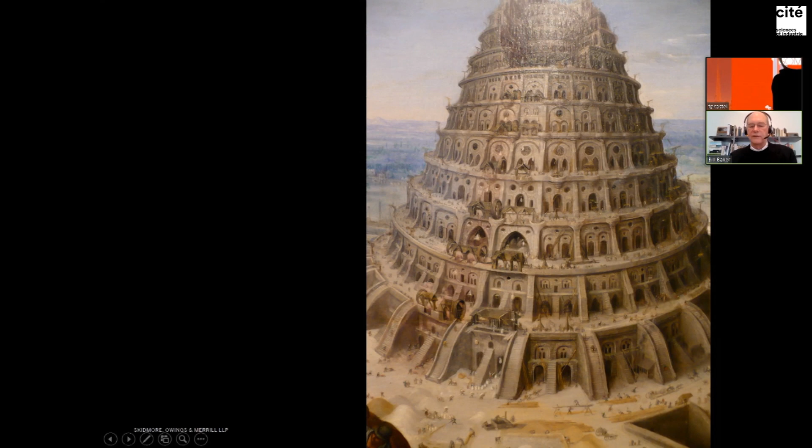We've always, as humans, had this desire to go high, to build things that are tall, or to experience great heights. It's part of our culture. You go back to the story of the Tower of Babel and wanting to build high, or when you go to the mountains, you have to climb the hill to see what it's like at the top.

Now in tall buildings, there's debate about what is the world's first tall building, but I'm going to talk about the Home Insurance Building a little bit. It was all of 10 stories tall, considered one of the first skyscrapers, built in 1885. For thousands of years before these buildings, people lived near the ground where they could walk up. But this building had two things that made it different: a structural steel frame, so a very distinct structure, and it was an elevator building. These two things, structure and vertical transportation, are the essence that affect the development of tall buildings.

So here we are in 1885. It's worth noting that in Paris, just a few years later, something much taller was being built. It wasn't considered a building, it wasn't considered an office building, but the Eiffel Tower certainly—it wasn't steel, it was iron—but it was certainly some brilliant engineering by Eiffel.

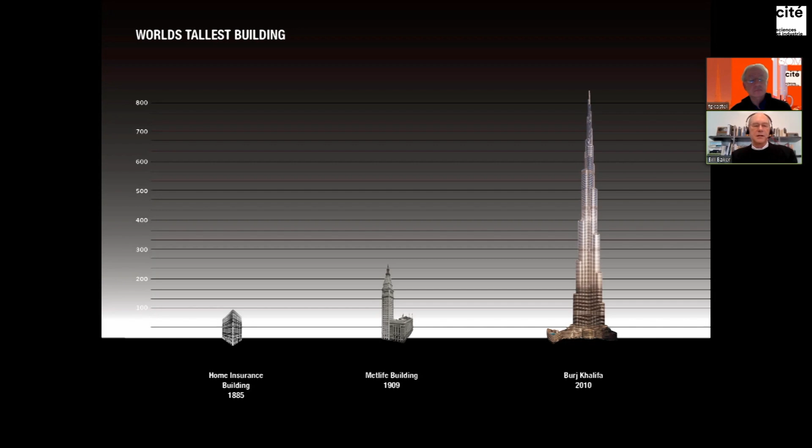Now, the height of buildings approaching the Eiffel Tower occurs early in the 20th century. And then we get to the Burj Khalifa, which opened 11 years ago. There's been this huge change, this huge scale in the height of buildings and the ability to go high. If you look at the history of what the world's tallest building was...

You can see that there was a quick run-up into the 1930s when you had the Empire State Building, before that the Chrysler Building—these tall buildings—and then there was a hiatus caused by the Great Depression and World War II. Eventually tall buildings started to be built again in New York, then Chicago, then around the world. But the interesting thing about the Burj Khalifa is that while many of the other buildings going back to the 1930s were just incrementally taller, the Burj Khalifa was remarkably taller.

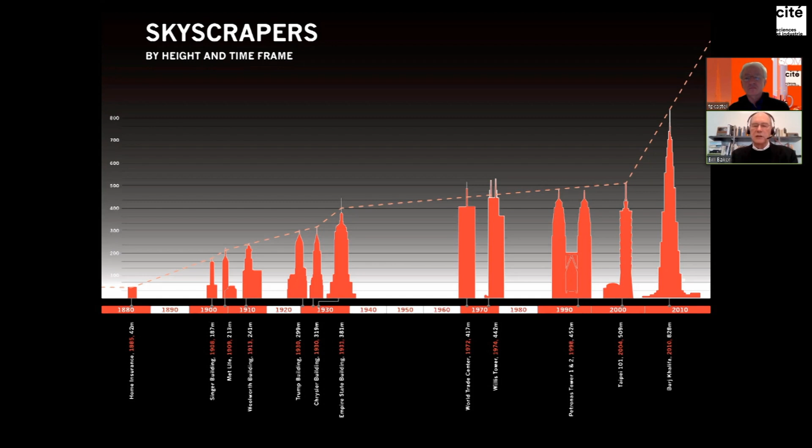In light of that, I want to try to get across a couple of ideas. One is that when you look at a tall building like this one our firm did—it used to be called the Sears Tower, now it's called the Willis Tower—if you look at that and see thousands of beams and columns, that's too complex, our brains cannot deal with that. But if you look at it and say that's one giant beam coming out of the ground, that's how we think about these things, as if they're one object. They're not many, they're one object made of many parts, but they're really one object.

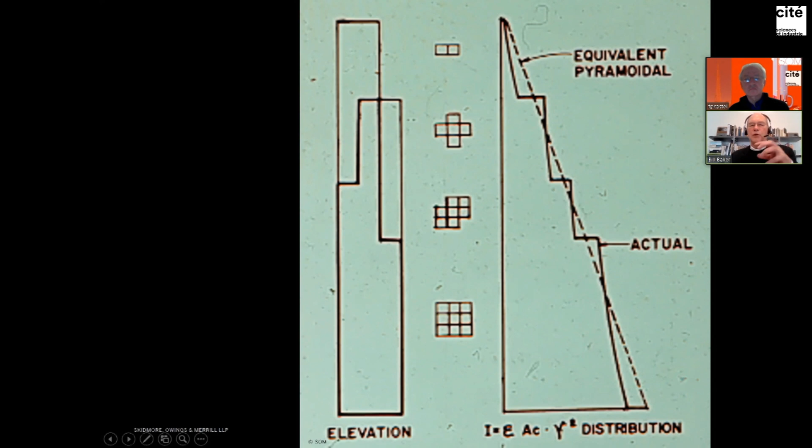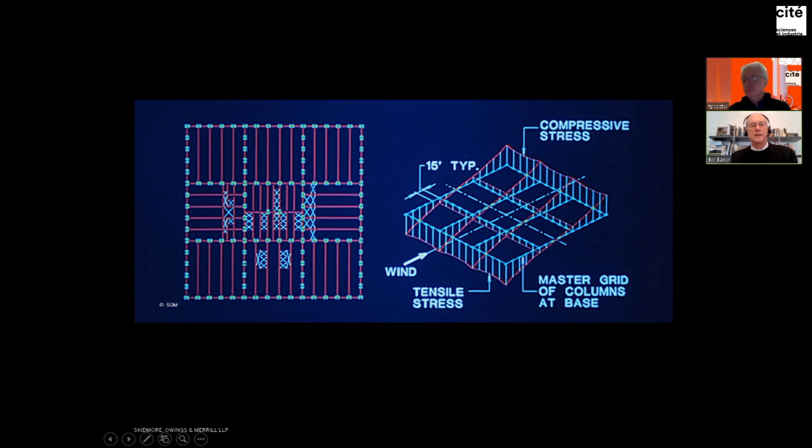I pulled this out of our archive at the office. This is a little diagram done by the designers, where you can see in the middle, the building is a series of tubes—it's called a bundled tube. There are 9 tubes that then go to 7, then 5, then finally 2. So it's like a giant beam where the shape changes as you go up. If you look down on the building, it feels like a series of boxes put together—these structural boxes, which clustered together, can resist the wind. The lines of columns in one direction act like the webs of a beam, and the cross frames act like flanges on a box beam.

And the other thing I want to talk about is issues of scale. I'm going to introduce that, but I'll talk about it a bit later.

It's kind of important to know where the heck is Dubai. Well, it's in the Middle East, in the United Arab Emirates. It's one of the few Emirates that doesn't have any oil, so their commodity is trade. Dubai is to the Middle East kind of what Singapore is to Southeast Asia - it's the place where everyone goes to do business. If you're a business person in one of the surrounding countries, you're likely to have office space in Dubai. It's a very welcoming place, very welcoming to people from all over the world.

We got involved in the project. We had a competition back in 2003, and this was our competition scheme.

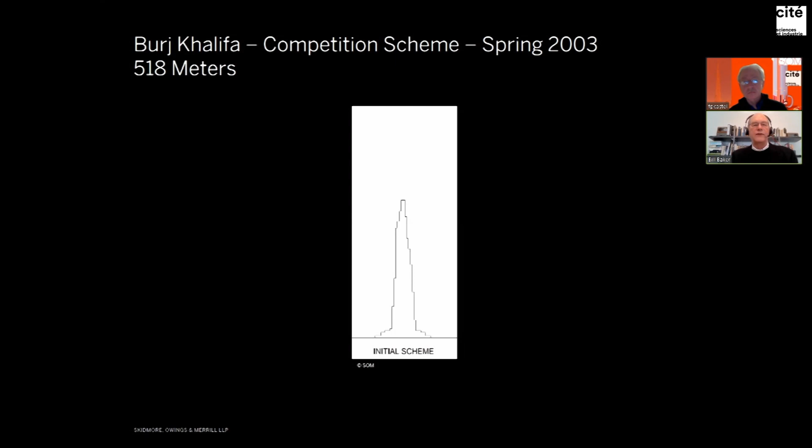Then in 2003, we were off to the races, and we started out with a scheme which was only 518 meters tall. It quickly grew to 725 meters tall, and finally the building we built was 828 meters. The change in height during the design phase was equal to the Eiffel Tower - if you took the building we started with and added the Eiffel Tower, you would end up with the building we eventually built.

It's 828 meters, slightly over a half a mile tall for those who use metric or imperial units. And how big is that? Well, here's what it would look like.

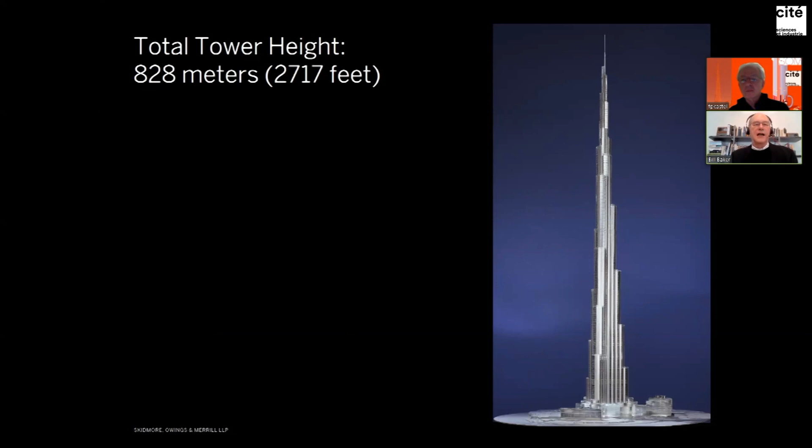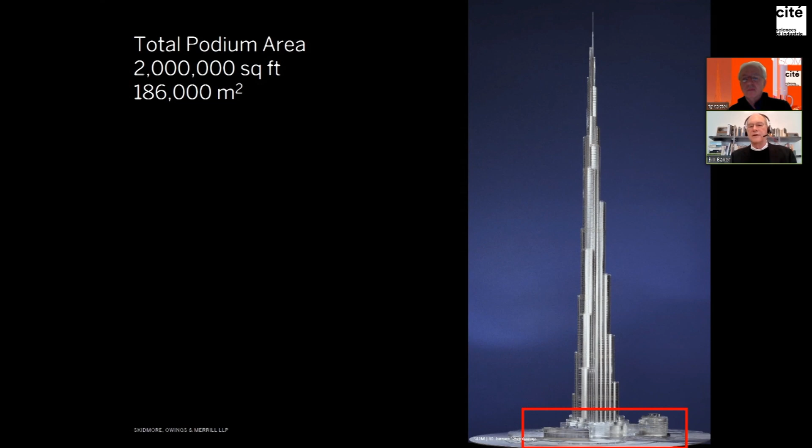Now what I'm going to do is give you a little tour of the building. As we said earlier, it's 828 meters tall. In the tower, there's about 280,000 square meters. So it's a big building, but there are bigger buildings out there. There's also a lot of area in the base, around 186 to 190,000 square meters. So the entire construction is in the order of 465,000 square meters, roughly 5 million square feet - a reasonably large project from an area point of view.

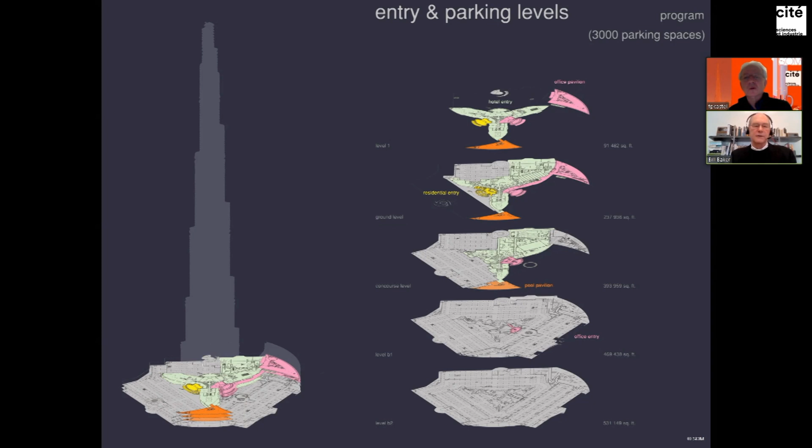Now we'll start in the basements. We have these huge basement floor plates in the order of 50,000 square meters, which have all kinds of base functions. But then you get into the tower proper.

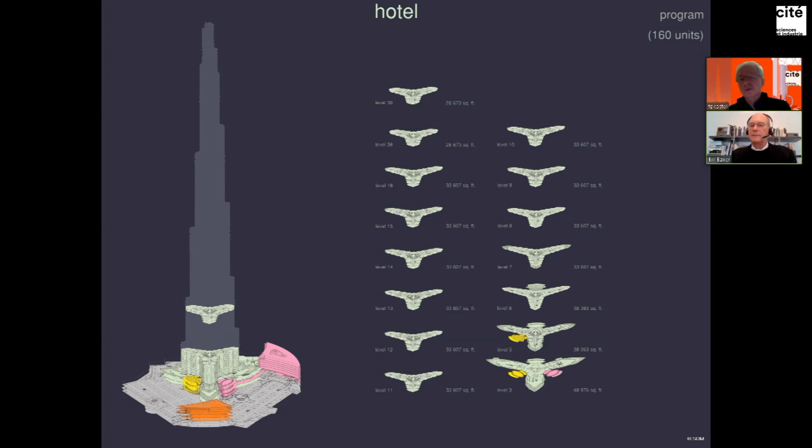These green levels are the Armani Hotel, so the program has these various components. The shape of the floor plate is not like many buildings, like office buildings - it's a Y-shaped floor plate. Here you have some of the lower floors. If you look at this floor plate, if you were a resident here, you wouldn't necessarily realize that you have the world's tallest structure above you.

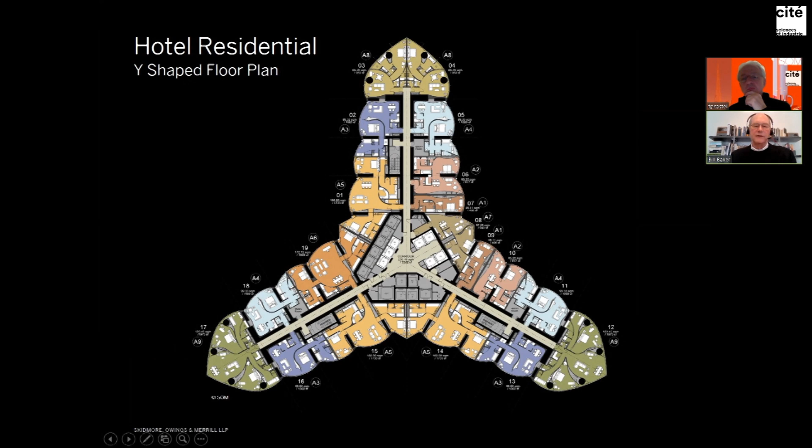So here we have the floor plate - I'll talk a little more about the arrangement of the building later. Above there are these blue, labeled in blue here - these are some more residential floors, and then there's another zone of residential floors, and the floor plate keeps changing. Then we have another zone of residential floors.

Now what's interesting is several things. Each of these zones we treat like separate buildings, because of issues like water pressure or voltage drop - you cannot have one mechanical space that services the entire building. It's too much. So from a mechanical and electrical point of view, it's a series of individual, in this case roughly 30-story buildings that are stacked on top of each other. Another interesting thing is that the client in 2004 sold the blue, the brown, and the yellow sections, and sold them in 2 nights.

It was to these buyers, and these buyers had to put down 50% of the purchase price within 6 months. One of the things about a residential building, as opposed to an office building, is that they can be somewhat self-financing if there's a market for them.

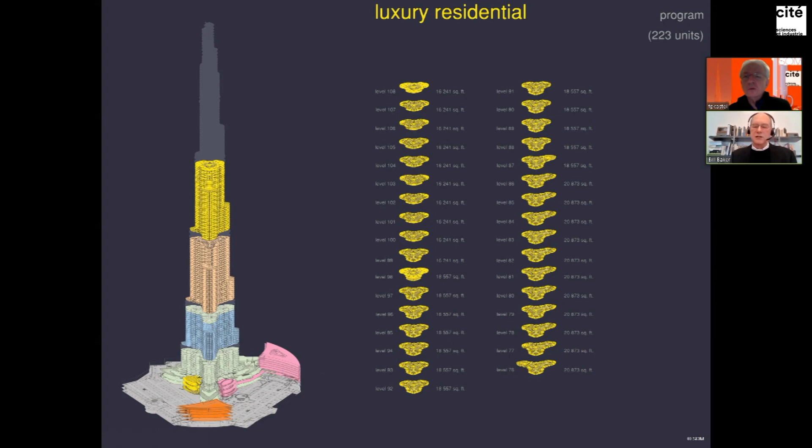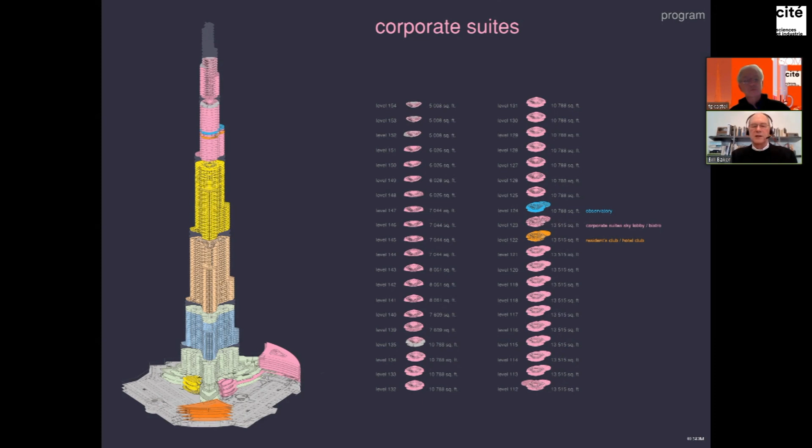We then continue up here. The floor plates are getting smaller, and then we have these pink levels, which are, believe it or not, office spaces. But they're not office spaces like most of us would work in. As I said, Dubai is the center of commerce for that region, so if you're a wealthy individual, you might have an office in Dubai where you do business deals, and that's the nature of these floors at the top of the tower.

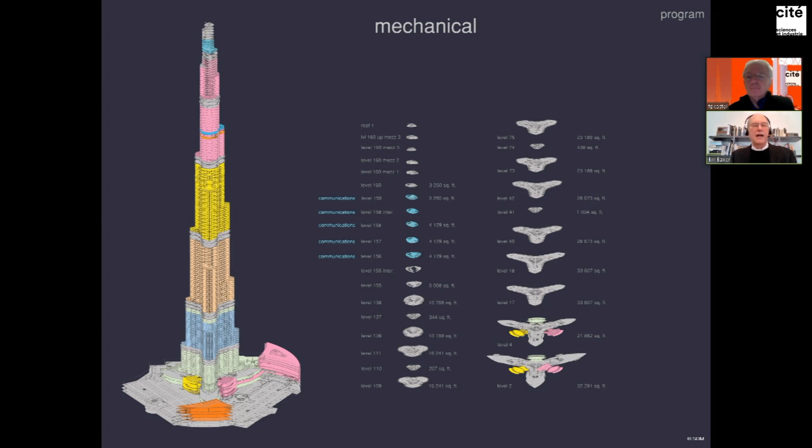As you go up, the floors are of course getting smaller. In between these colored zones, you have other levels where all the mechanical systems are—where you get your fresh air, your transformers, and your fire pumps for fire protection are all there. What's interesting is this building is so tall that you actually go through a climate change as you go higher, so these actually pull in the air locally, giving you efficiency from getting high in the sky in a desert climate.

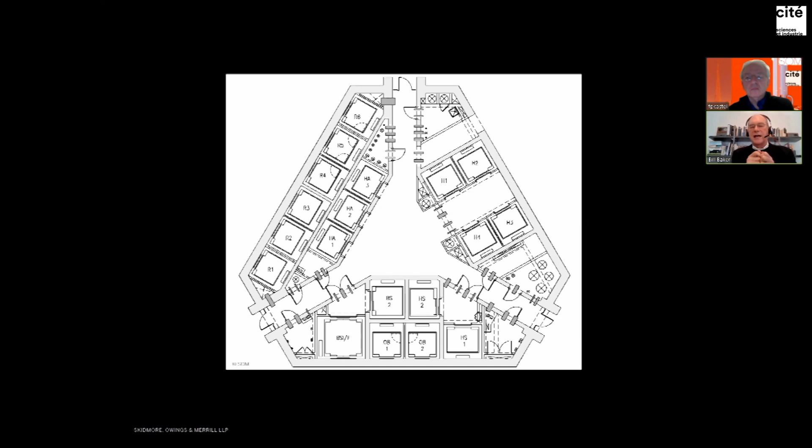I talked about structure, but vertical transportation is essential. Believe it or not, this is the most elevators or lifts we have in any place in the building. There's only 19 shafts, but we have 54 elevators. So a lot of the art of a tall building is how to use this space, and you'll have shuttle elevators that take you to what we call sky lobbies. From the sky lobbies, you go to your local floor.

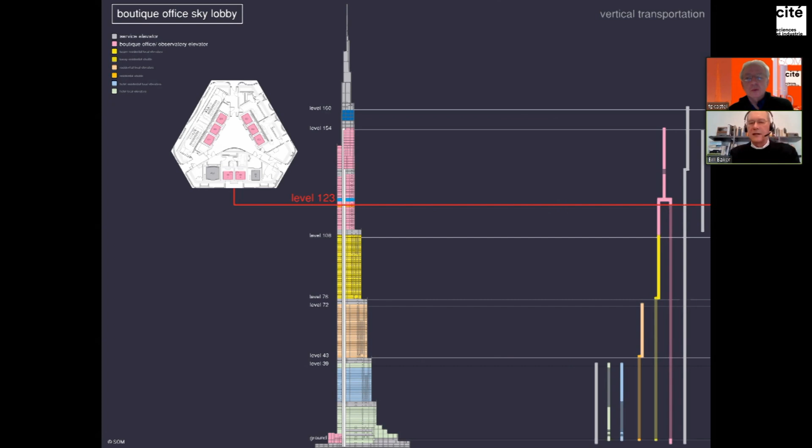This is a mapping of the elevating of the Burj Khalifa. It's like taking an express train—you might take an express elevator, a shuttle elevator, from the ground floor up to say level 75 or 76, and then get into your local elevator that takes you to your individual floor. The time it takes to get from the ground to your unit is around 2 minutes. A lot of times you'll take an express elevator, then a local elevator to get to an individual floor. And here's what the floor plate looks like.

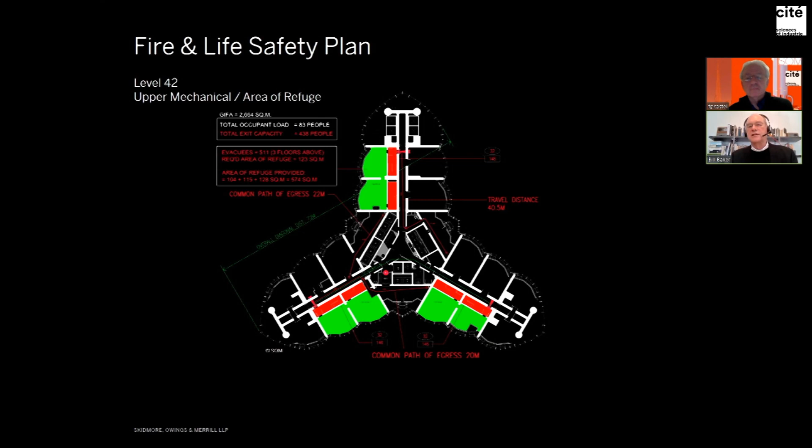We actually have stairs in case you have to walk out. But roughly every 30 floors, we'll have something called an area of refuge, where someone can get out of the stairwell and rest if they choose to. These are protected areas.

What made this building possible? Well, luck was a lot of it. Being in the right place at the right time is always helpful—you need all your stars in alignment—but there are some technical issues that also made it possible. The structural systems, we did a lot with wind engineering, which is kind of a dominant thing in tall buildings. And then you had to build these things, which are really an integration of systems. These are really Swiss watches.

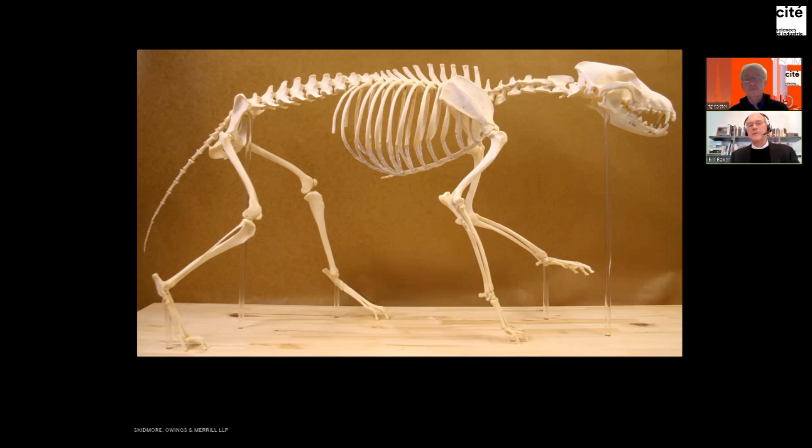This is a large mammal, but you can't get any bigger because what you need to do is invent a new animal, a new creature. And this applies to tall buildings also, because if you took the Sears Tower, now called the Willis Tower, and made it twice as tall, you'd have to make it twice as wide, twice as deep, and the area would go up by 8 times. It would just be too big. The market could never afford it.

So one of the reasons we invented this new system is we went up with a system that only scales by the square rather than the cube. If I were to make the Burj Khalifa twice as tall—and I wouldn't do that actually, if I needed to be twice as tall I'd invent a new system—but if you were to make it twice as tall, you'd have twice as many floors, and they'd have to be twice as long, but they wouldn't have to be any wider. But Bill, how tall could one go?

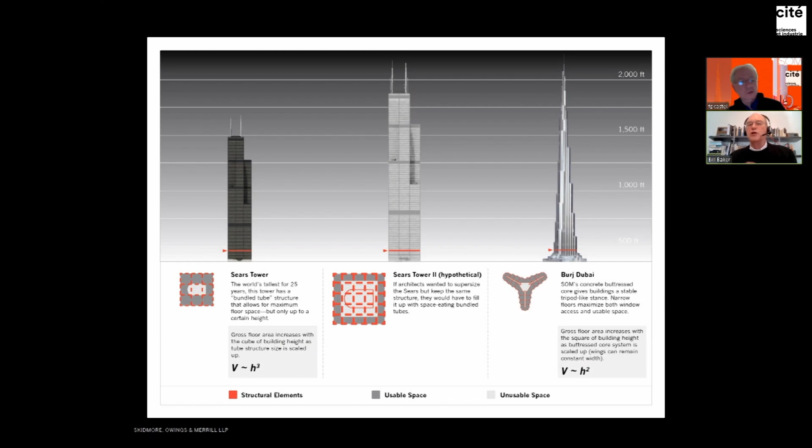Well, we're very, very confident that we could easily go twice as tall. It would be a different system, and perhaps even taller. I think you could build it just as quickly as the Burj Khalifa was built, because we know so much. But the essence of this is understanding issues of scale, gravity, and wind. You have to invent a new animal, because just as you're not going to take a rabbit and make it the size of a whale, it has to change. So we would have to create a new species, a new animal to get there.

Bill, did you have to, even if you had so many studies and work before building it, did you have to adjust during the building process? Oh yes, very, very, very much so. We started out with an idea, and quite frankly, our first idea didn't work very well. We won the competition, immediately went into the wind tunnel, and the results were not good.

So we went back and made a bunch of changes in the building, and as we did these changes, the building got better. The reason it was able to grow by over 300 meters, 310 meters, during the design, is because we were kind of lucky that we started off on the wrong foot—we had to make enough changes that we ended up having something much better. So it was very evolutionary in the design process.

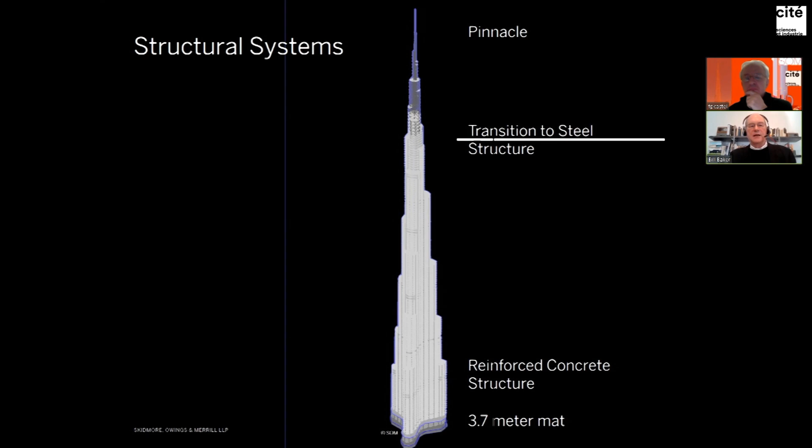In fact, this building is mainly reinforced concrete with a steel spire at the top, made of very simple elements like walls, slabs, and a few columns. And if I were to do it again, I'd have even fewer columns.

But what it was is, we ended up with this system we called the Buttressed Core. We only gave it this name late in the game. What we did is let your ideas flow freely and let the design change, and when you think you're about there, try to describe what you've done in words. If it takes a lot of words, you're probably not done—it's too complicated. But sometimes you can get down to just two words, a noun plus an adjective. The Sears Tower I showed you earlier is called a bundled tube, two words. The Hancock in Chicago is called a braced tube. And this, we looked at and said, what it is, is a buttress core.

We have hexagonal concrete walls in the middle, which surround the elevators. This is very important—we call this the core. It's a closed shape, like an axle. It keeps the building from twisting. So when the wind blows against it, it doesn't twist, but it's too slender to go to such great heights.

So what we did is we buttressed it. We put these walls down the corridors, and then cross walls between the apartments. So the center is like a tube you might see in a structure, and the wings are like an I-beam, like you might see in a bridge. We put them together to create this new system. One can imagine the wind coming in between two of the wings, and what happens is that third wing buttresses it, embraces it.

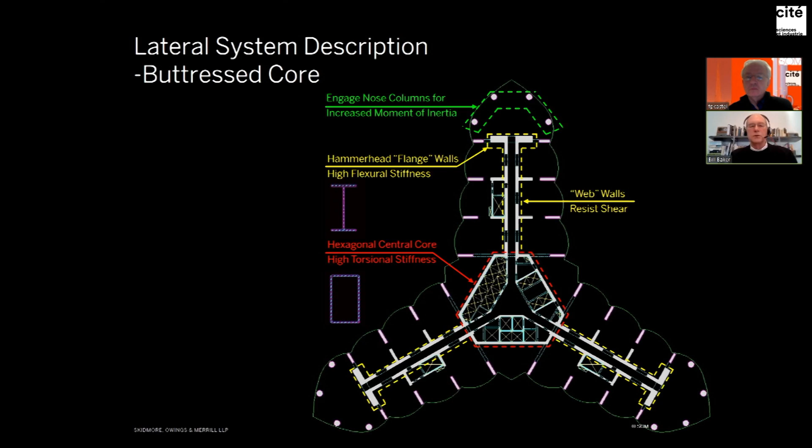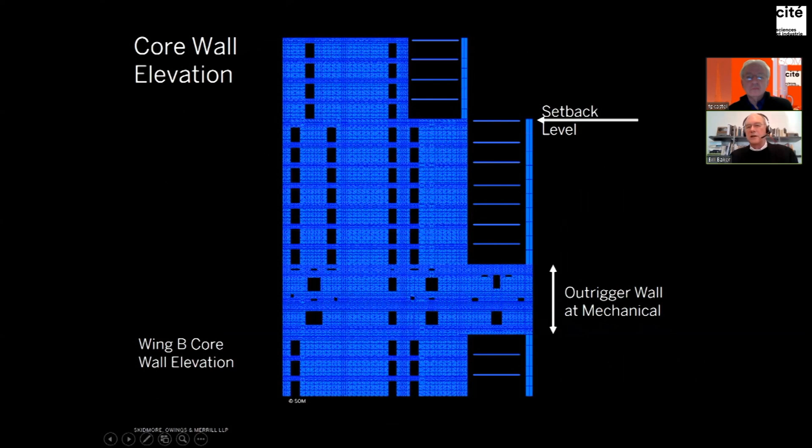But because of the way we controlled the wind and the shape, even in a storm that happens once every 1,700 years, there is no uplift, there is no tension. The building is as stable as the Eiffel Tower.

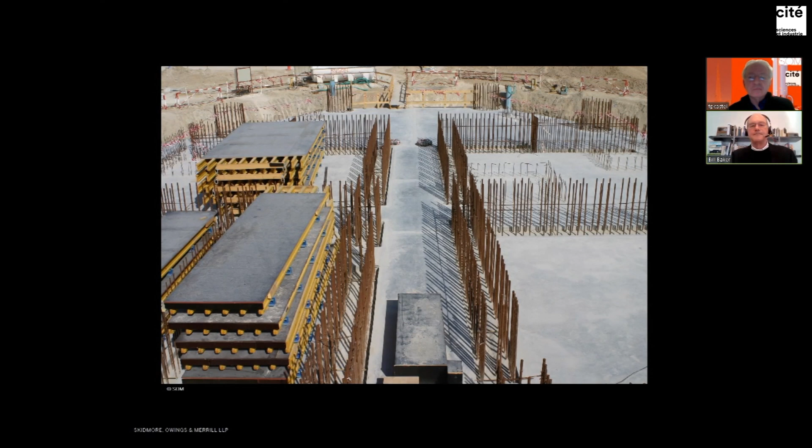Eiffel totally recognized that wind was the dominant thing in tall buildings. It's also dominant and very important in bridge design, which Eiffel did so much of.

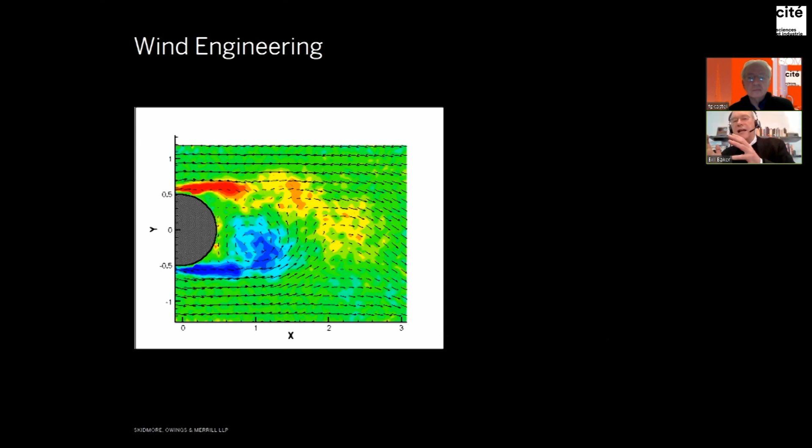When wind goes past an object, it goes by in kind of an irregular manner, first on one side and then the other. Every time this happens, it causes a pressure differential that makes the building want to rock from side to side. If a tall building were ever to fall down from wind, it would probably fall sideways, not in the direction of the wind.

These pulses are like when a child is on a swing set and they kick their feet. If they kick at the natural harmonics of the swing, they go higher and higher and higher. So that's the problem we're trying to resist, or not let happen, in the design of the building.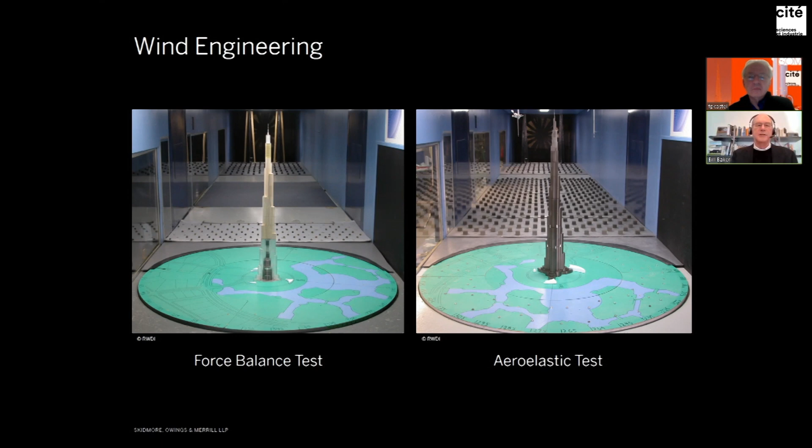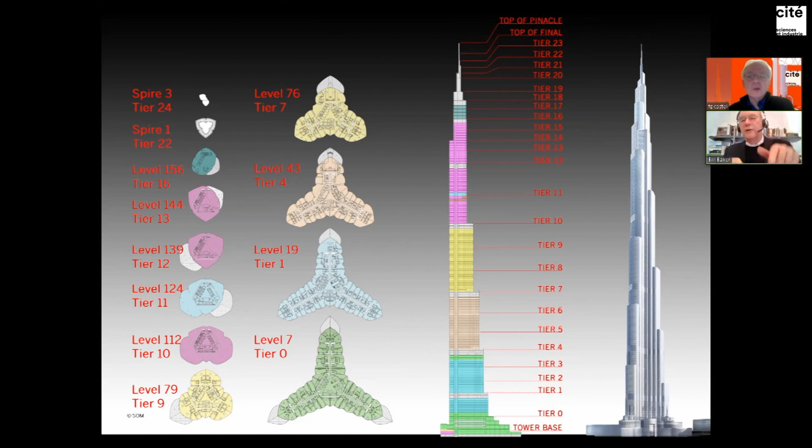So we did a bunch of wind tunnel testing. What we did is we ended up reshaping the floor plate continually. So instead of that child on the swing having two feet that are kicking together, this child has like 27 feet that are all kicking at different rates, and the swing set doesn't go anywhere. So we did this series of studies.

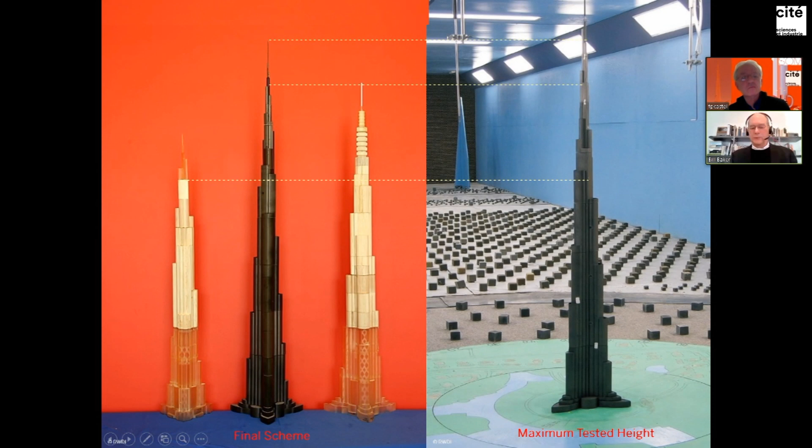On the far left is our first study, which did not behave very well. The wood one on the right is the intermediate, and the black one is what we built. We actually tested one building that was much taller than the one we actually built, and it did pretty well.

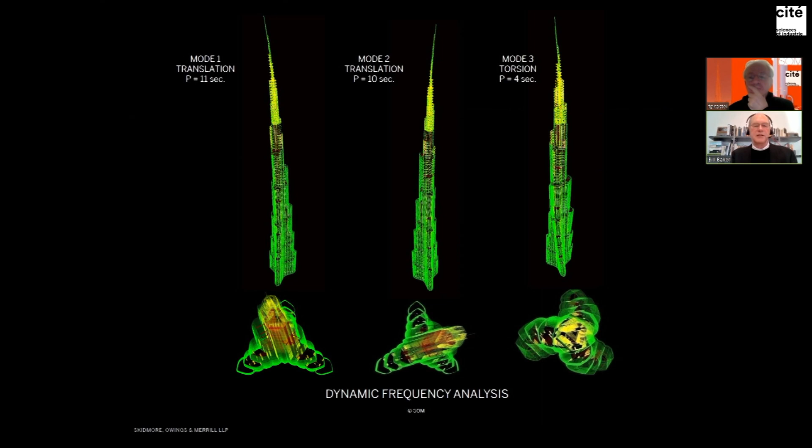We then take whatever vibrations come from the wind and we tune the building like a musical instrument. When we get the building to move kind of slowly, it doesn't move the way the wind wants to push it — it moves in a different direction. We tune these buildings like a musical instrument, and this would happen in the design phase.

But we weren't able to accommodate this design because it came too late. There was actually a hot spot around the 40th floor, and we'd already built the 40th floor.

Now Eiffel was very much into wind also. He actually turned the Eiffel Tower, after the exhibition, into a laboratory, and he did all these wind tests.

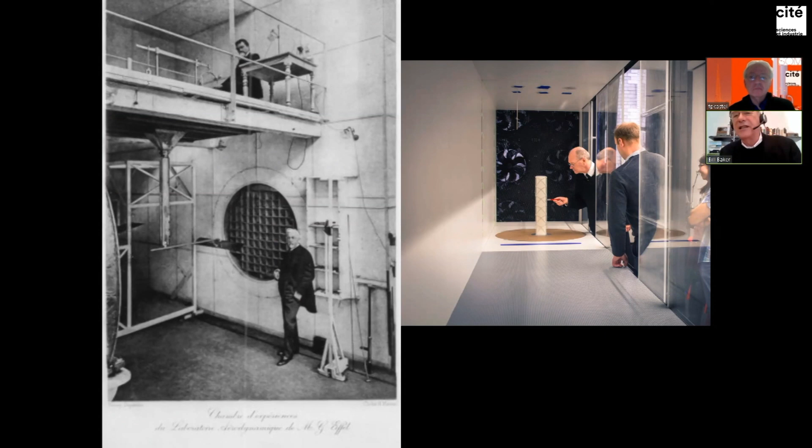So he would drop objects down these cables and measure the wind resistance, and eventually he actually built a wind tunnel at the base of the Eiffel Tower. Here on the left, you see it, which was later moved to another location. Here's Eiffel and his wind tunnel, and here's me in our wind tunnel. We actually have our own wind tunnel also, just like Eiffel.

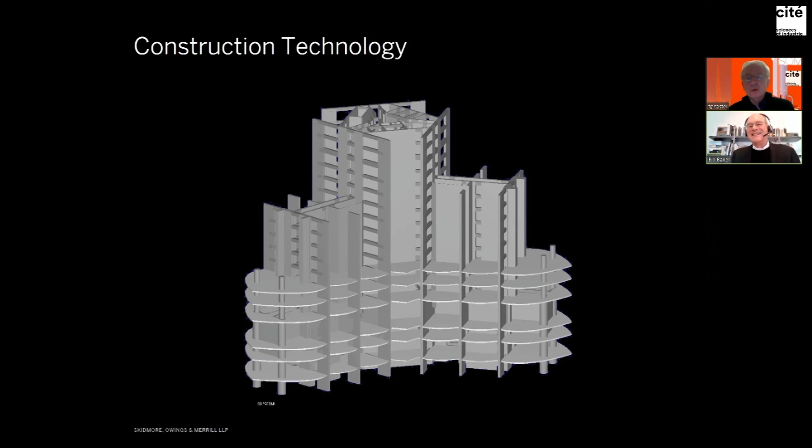So the construction is fairly common components. I once gave a lecture, and one person in the audience criticized me for using such conventional components like walls, slabs and a few columns. I said, well, I actually wanted the building to get built. If you're going to try to get a contractor to give you a price for a building taller than anything ever built, using a system they've never seen before, your chances of success are pretty small. So we use this magic stuff that we still call concrete, but we should probably give it a new name—the gray stuff you walk on the sidewalk has nothing to do with this material we use in tall buildings.

Why did you use concrete and no other material? Well, for this building, a lot of it had to do with the fact that it was residential. Your spans, your distances, were very small—only about 9 to 11 meters from the glass. But also, it turns out concrete is very efficient. These buildings have large vertical loads, and concrete is a very efficient way to take what we call compression, whereas steel would be much more expensive. Now, Ken's building is primarily an office building, so it has both, and we had steel at the very top. But concrete was the appropriate material for this because of its height and its use.

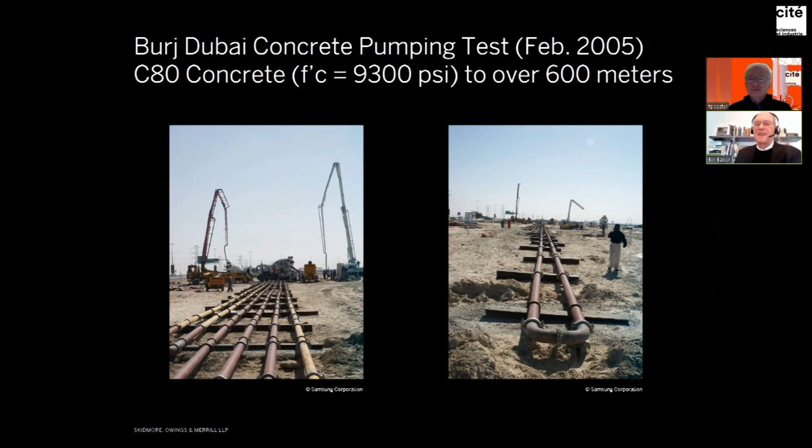Now, the interesting thing was the contractor wanted to see if they could pump concrete 600 meters in the air, and I was thinking, how are you going to figure that out? What they did is they ran piping back and forth across the desert floor until they got a pressure loss equal to 600 meters. Then they tried various concrete mixes to see if what came out the other end was still concrete. Eventually they came up with a formula for the concrete that was useful.

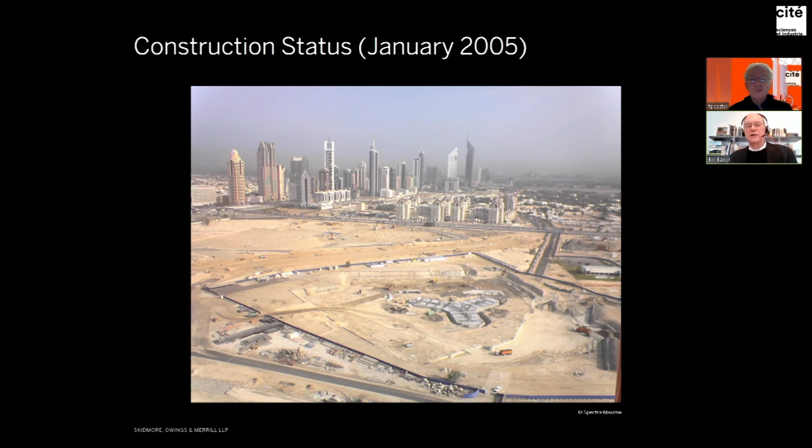Here's what it looked like. The foundations went in, and then it sat there for several months while the contractor, or the owner, Emaar, negotiated with the main contractor to build the building. But look at this—here you see the desert with nothing around it, and now it's this hugely important commercial urban area. This was originally a military base, and as you look at some of the later photographs, look how this whole area has changed.

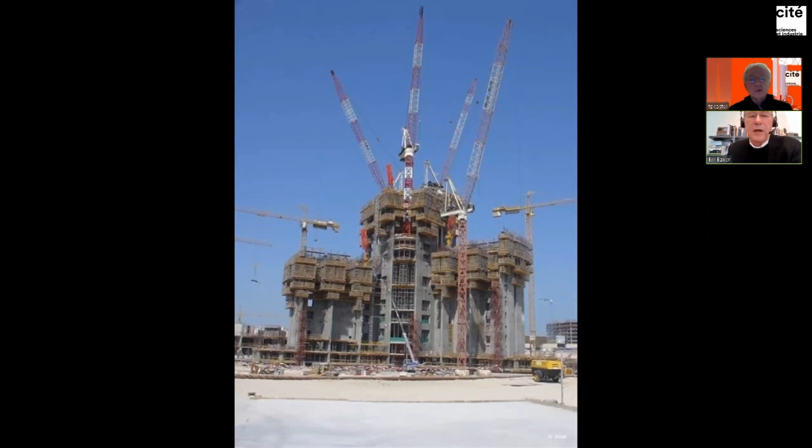Anyway, the tower construction proper started in April, here in 2005, and then it's up. These are like vertical factories, where the formwork jacks itself up. The concrete is pumped from the ground, and the only thing you have to pick up with a hook is the rebar cage, so it was able to go very, very quickly.

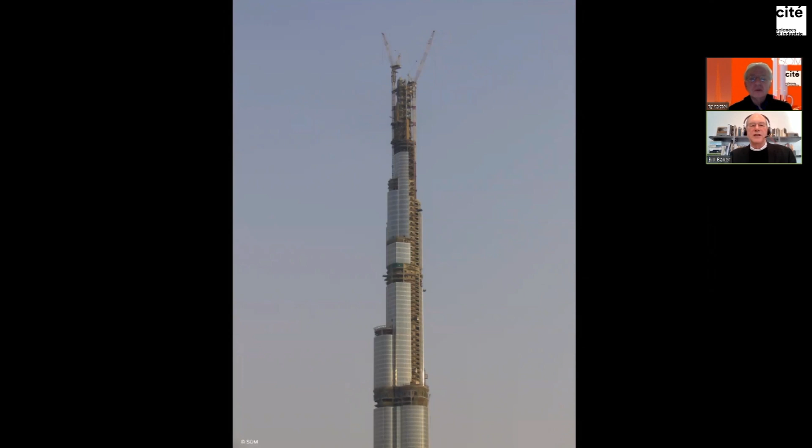Unfortunately, the cladding contractor went bankrupt on us, so for a long time I got to see just the structure. But eventually Far East Aluminum came in and started putting a skin on it, and up it came. We were not able to build the spire on top of the building—it was too high—so what we did is we built it inside the building. We used a good French technology by Freyssinet, the VSL strand jacks, so we built the spire in the building and then jacked it into position, and it came out the top of the building.

Of course, there's a light bulb on top. If anybody wants to be exciting, they can be the light bulb changer. It is remarkably the lightning rod for Dubai. I've been there on stormy days, and it gets hit by lightning all the time, but it does no damage because the building is properly grounded.

As I said, it opened on January 4th, 2010. So we all went to Dubai to watch it. They announced the height because it was a big secret, and they also changed the name. I knew about the height because I was an engineer, but I did not know about the name change. They even kept that from me.

They named it after Sheikh Khalifa, who's the president of the United Arab Emirates, the Burj Khalifa. It was formerly called the Burj Dubai. They had this giant fireworks show, and as an engineer I was sitting there thinking, this is not a good idea. But the building was okay, it wasn't damaged by the fireworks, but it was really quite dramatic.

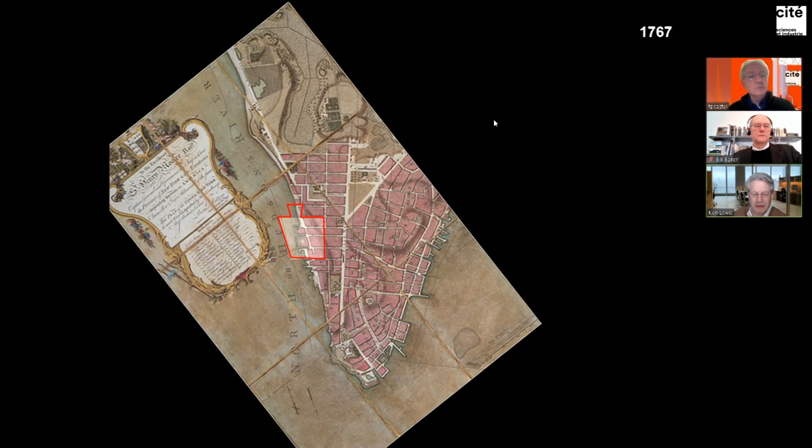What's most important is to realize that part of the site is in the river. Over time, as the city developed and grew north, the hills were knocked down, material was pushed into the river, and piers were built so that silt would build up, and slowly but surely the city grew up around the site.

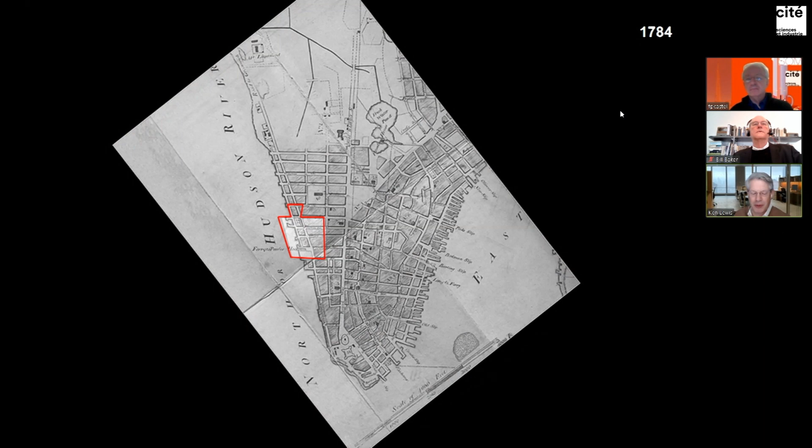By the mid-19th century, the site was completely enclosed and filled in, but there was still water there. More and more, the city grew from the tip of Manhattan north.

By the 1960s, a lot of the city had fallen into a certain state of disrepair in Lower Manhattan, as the modern city emerged in Midtown, about 40 blocks north, around Grand Central, the Empire State Building, and even further north around Park Avenue.

At that time, there were two people very much interested in preserving the power of New York, both shipping and importing as well as finance. They were both named Rockefeller: David Rockefeller, who led the largest bank, Chase Manhattan Bank, and his brother Nelson Rockefeller, who was the governor.

They put together a proposal to save New York by taking over this area that is now the World Trade Center. It was called Radio Row, where you went to get your radio and your dishwasher—just parts and things. It wasn't a very successful business area.

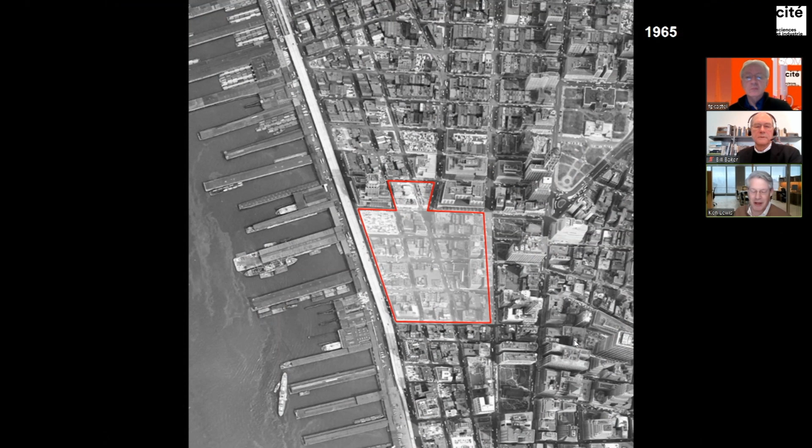On the right-hand side was a new headquarters for Chase Manhattan Bank, a modern building also designed by our firm, Skidmore, Owings & Merrill. And the harbor was also being dredged.

So the proposal was to create an international center for trade called the World Trade Center. It was designed by Minoru Yamasaki in a competition, a brilliant Japanese-American architect.

However, he designed it as if it was a fortress—again, it wasn't a great area to be in. He raised the buildings up 32 feet, approximately 10 meters, and all of the roads were blocked. It was as if it was a samurai castle.

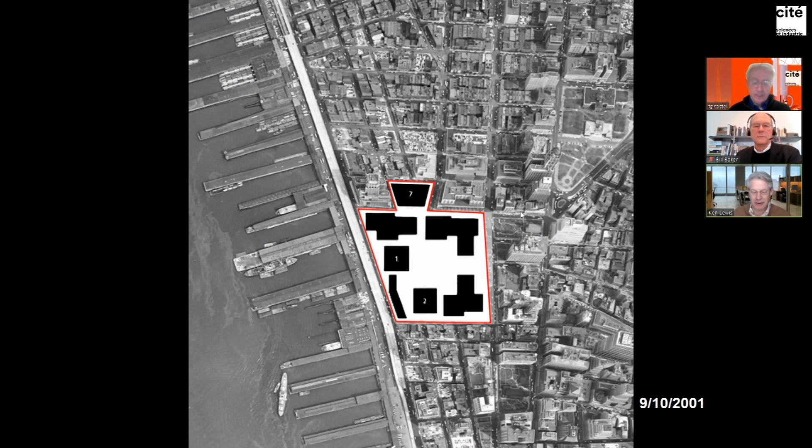And that's where we were on 9/10/2001: the two great towers and some lower buildings, as well as 7 World Trade Center, a new building to the north. And then 9/11 happened.

Our office was located mere blocks away. Bill and some colleagues drove all the way from Chicago to New York to assess the situation. Unfortunately, there was not much to assess or to help, but they worked with the fire department to check buildings for other potential failures.

And that's where we found ourselves, so we pushed ourselves away. We lost a colleague that day who was at the Trade Center. There was a lot of emotion to it, but we put it aside as professionals.

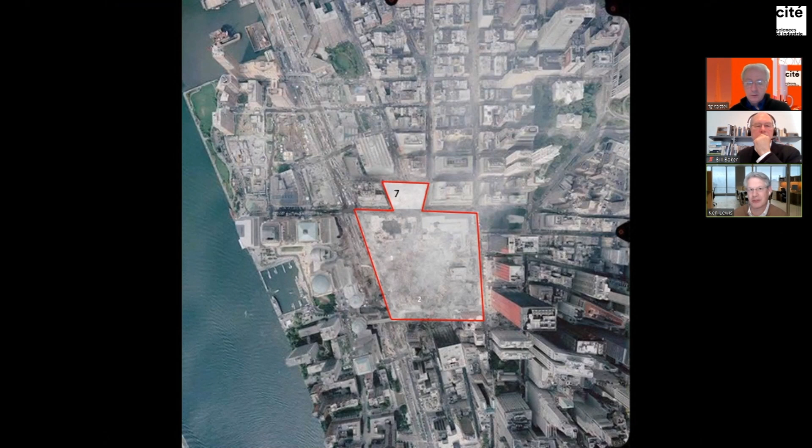We began to think about the site and what it meant to us. The most important thing we wanted to do was reconnect the site with the city by connecting the streets to the north that follow the river, West Street and Greenwich Street, and the streets running east to west from what is now Battery Park City to the financial district to the east.

This became the basis for a master plan by Daniel Libeskind, in which there would be 5 towers around a memorial site you can visit today, wherein the footprints of the old, destroyed towers would be left as a memorial—a symbol of the loss within our city.

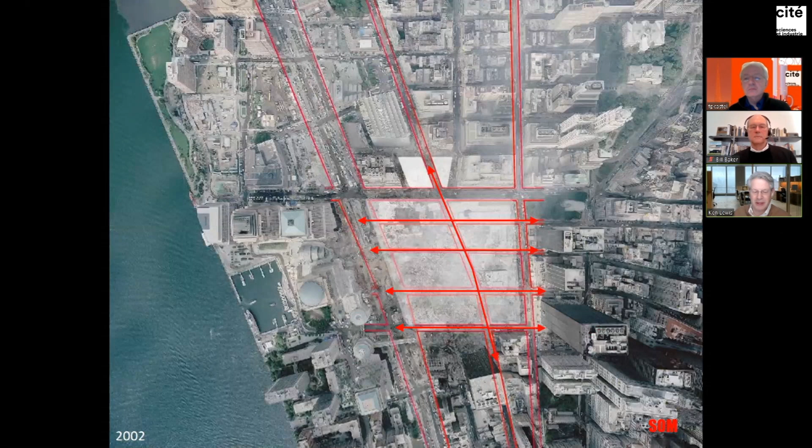Well, how did we get here? We began by looking at symbols and thinking about what a tall building would be. We had lost our symbol in the Twin Towers. And also, we looked across the harbor at your gift to us, the Statue of Liberty. It's a brilliant building that also involved Eiffel in the structure.

Well, let's see where we begin here. Let me just go back. So Eiffel, and in the form of the Statue of Liberty, and the Trade Center were the symbol of New York. It's what you recognized no matter where you were. And so we began with a simple exercise, like most people do, a sketch on a piece of paper.

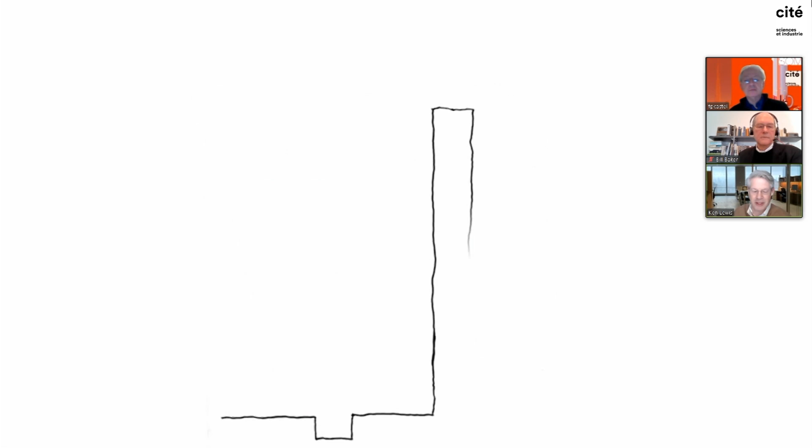And we drew the 2 streets coming through, Greenwich and Fulton, the 2 footprints, and Tower 1, which would take its form and shape from the site. And where the memorial, those fountains that I showed you, would be the void in our city and in our hearts, the tower would be the marker in the sky, reaching up to 1,776 feet, the founding of our country, the date of independence, and also would mark the heights of the old World Trade Center towers, which actually were at 2 different heights, 1,362 feet and 1,368 feet. We never really found out why they weren't the same height, but it became something important to us.

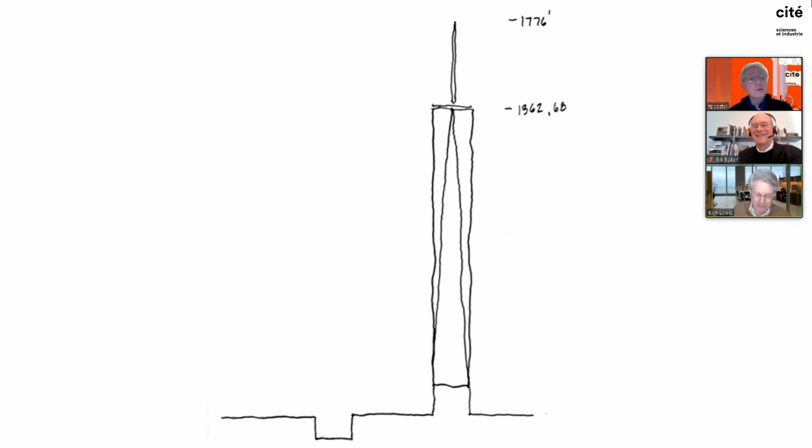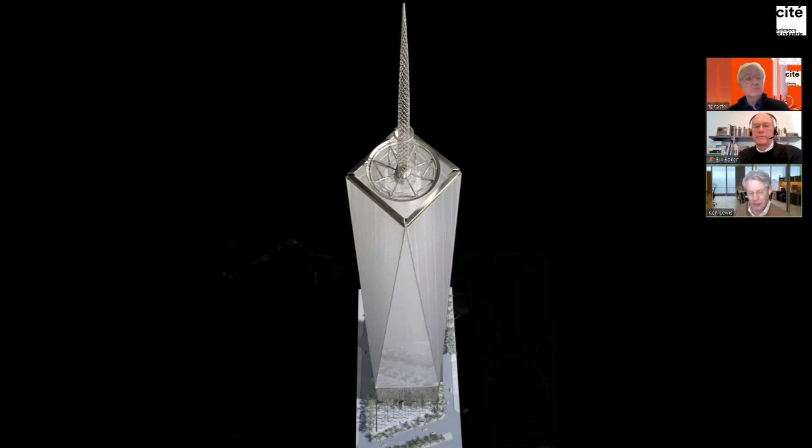Why do we do this? We did it because it creates a dynamic about the building as you move around it. And so when you look at it from another angle, the change is more of a pyramidal shape that's going up. What does a pyramidal shape do? It reminds us of other monuments in the world, including the Washington Monument in Washington, D.C.

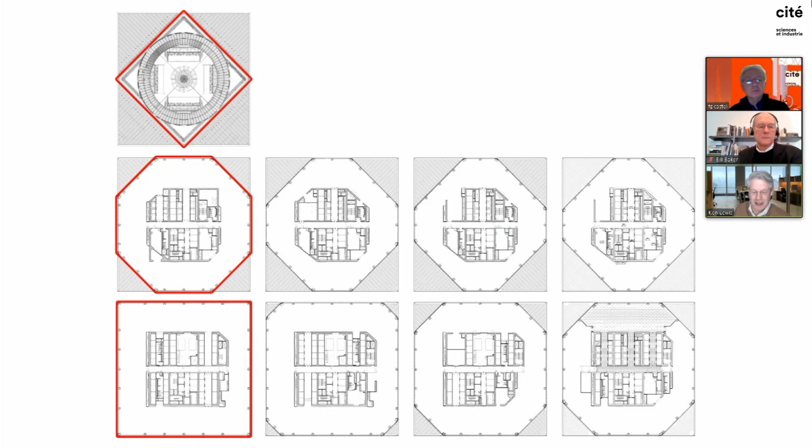Well, here's the floor plan. It goes from a square at the top to a square at the bottom with an octagon in the middle, and is changing floors as it goes up. This actually played an important role in our planning, which I'll talk about in a few minutes.

And there it is. When David Childs, our design partner, was thinking about this, he thought it was very important that a child would be able to come to New York and do a sketch of the building. He thought about 2 different monuments, the Capitol, which of course has been in the news lately, and the Washington Monument itself. He realized that if it was something very detailed like the Capitol, you wouldn't be able to sketch it, because is it made of 2 domes or 3 domes? Is the dome bigger than the base? It's a little more complex. So he said to himself and said to our team, let's think about this as simple as possible. And the Washington Monument is that. You can sit there and sketch it very quickly, and its form comes to mind and obviously has its symbolic values.

We also incorporated the spire at the top of the building, which has a beacon. Some would say a beacon of hope, but the thing we were thinking about was that there were light ships that stood outside the harbor of New York, actually just over the horizon. They would be placed there, and they would flash in sequence in Morse code, the letter N for New York Harbor. And so we integrated that element into the building, and there's a beacon there today.

So the program from the top, stepping aside from all the symbolic elements. At the very top of the building is the communications tower, the Spire, which is the broadcast antenna for all of New York City.

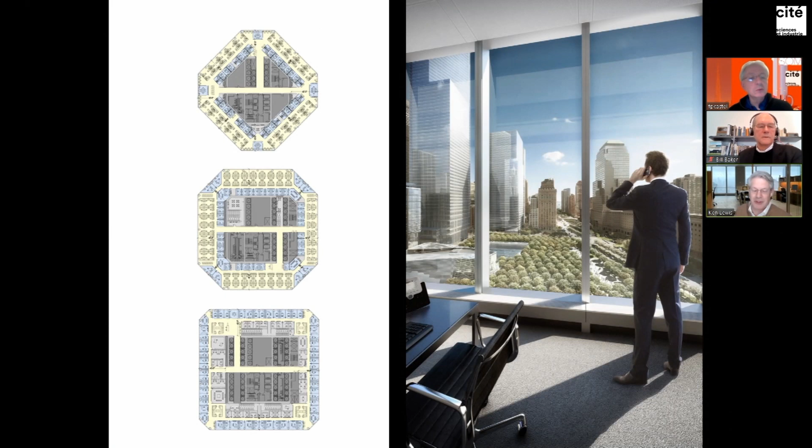And then of course, there's really the engine of the building, which is the offices that are in it. We didn't know who would be in the building, so we had to imagine a person who would be coming to it. In this case, it was a young man coming to New York, and actually we did it with both a young man and a young woman. We have two versions of this, coming to the city to make their fortune or to participate in all the things the city has to offer.

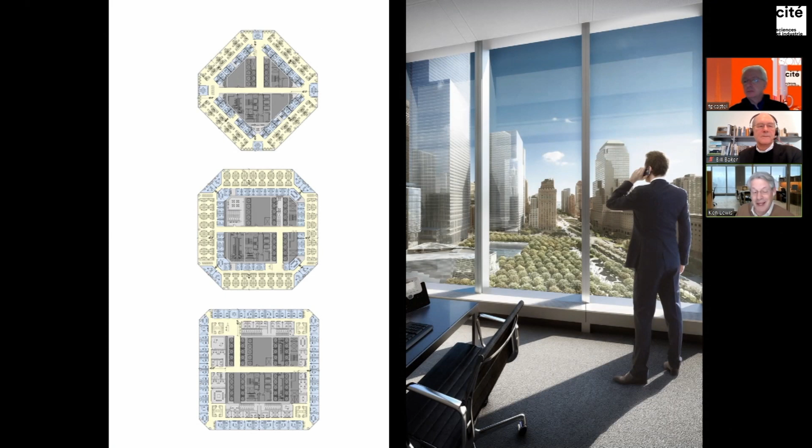We wanted to create a building in which the form, the materiality, and even just the vision of it would attract the person, would retain the person, would have the person coming here, as well as look at the different plans. So we had in our mind a law firm, a consulting firm, a financial firm, and actually an architecture firm, though we never could afford to go there.

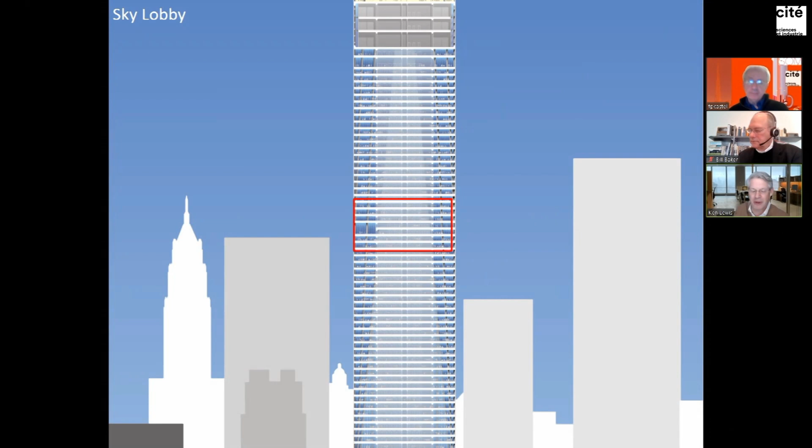At the middle of the building, as Bill has said, elevatoring is a key component of this. If we had the elevators serve all the floors in the building, it would create a huge core and great inefficiency. You wouldn't be able to have any space around that giant core. So we created an intermediate floor called the Sky Lobby, which would be like a lobby in the sky for everybody to come to before they transferred between the low-rise express elevators and the high-rise.

You can see we sort of saw this as possibly a place for runway shows, for fashion events, which have happened. We didn't have any idea that Condé Nast would move into the building along with Vogue and all the great fashion magazines.

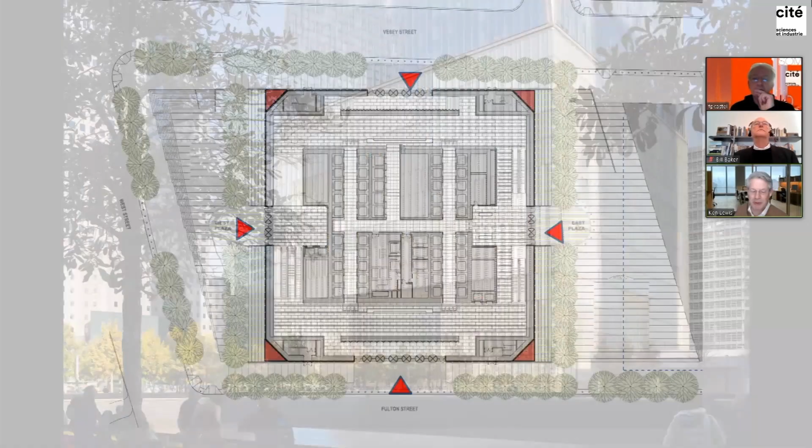At the base of the building, a building like this needs a base, something powerful, something representative of its strength, but also something that needs to breathe. For this building, this is the lungs of the building, and it's a translucent glass wall that has all its electronics like the Burj. It can show digital art. That was our intent, and it's continuously going on, but also needs to feed all the below-grade areas with air.

It also has multiple entrances. Going around, there are two office entrances on the north and south side, an entrance to a public park that will eventually lead to the Performing Arts Center to the east, and then the observatory entrance - a very different group of people coming to the building who don't necessarily want to cross paths with the business people heading to meetings in the tower, as they head downstairs to go into the express elevators.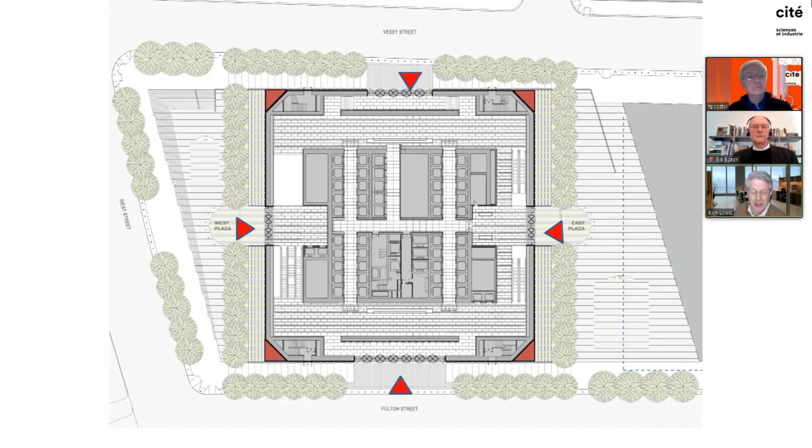This is looking into the lobby, where we have another memory element, which is the large core of the building coming down, as if you carved it out of a marble mountain in Italy. We brought along the same stone, the height of the lobby. It's something we all remember from the first time we visited the Trade Center and came in. Through both artificial and natural light, we allowed light to come into the lobby and kept it very simple, along with selected artwork.

Below grade is the observation deck entrance, which you see here. You come down and go around to North America's fastest elevators. They go 10 meters in a second. You don't really feel it, because it goes slow at the beginning and then it takes off. But basically it means you can go from the bottom to the observation deck in 30 seconds.

That lower level also connects with probably the greenest, most sustainable element of the building, which is the 11 subways and trains that connect to it through the concourse and to the Oculus, as well as over to Brookfield Place to the west.

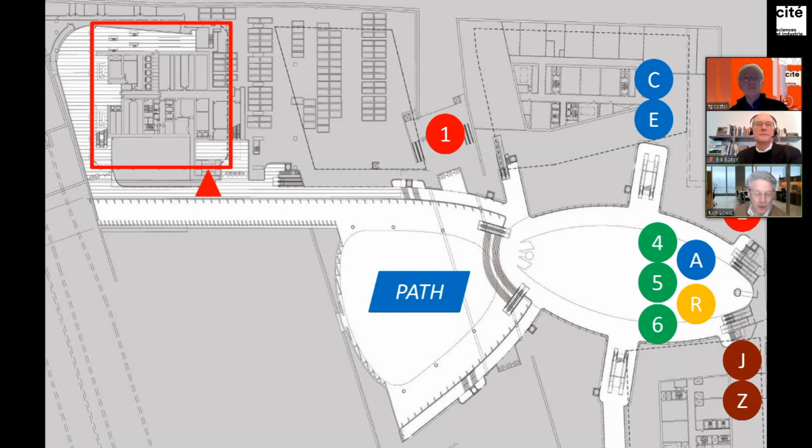Now, one component, I'm gonna pause. Friedrich, if you have any questions, I could pause here. I'm not sure. Let's keep going because there are a lot of questions already. Okay, they need more explanation. Sure, at this point, but yes, of course.

Perhaps to insist, how did you work to design an icon, and why was it so important?

So we designed an icon in a collaborative environment. There was a team of maybe 10 or 11 people at the beginning sitting in a room discussing the characteristics of the building. We were getting information from consultants, some of it very serious, having to do with other threats that might exist. But probably the tool that tied us all together is what you see in this picture, and it was used by all components of the building: our building information model, what we call the BIM model. This was the first large-scale project using Revit, that's the brand name, in our office, and it's now the standard for BIM modeling in the United States.

It involved the structural engineers, the mechanical engineers, and in this picture, the contractors who were figuring out how to erect it using our model. The model was so big that by the end we couldn't use it. We found out later, when we did some diagnosis, that all the screws were in the doors and all the hinges were on the doors in the model. You don't need that information. So the model itself was 120 gigs of information, which was too much for our computers to handle at the time.

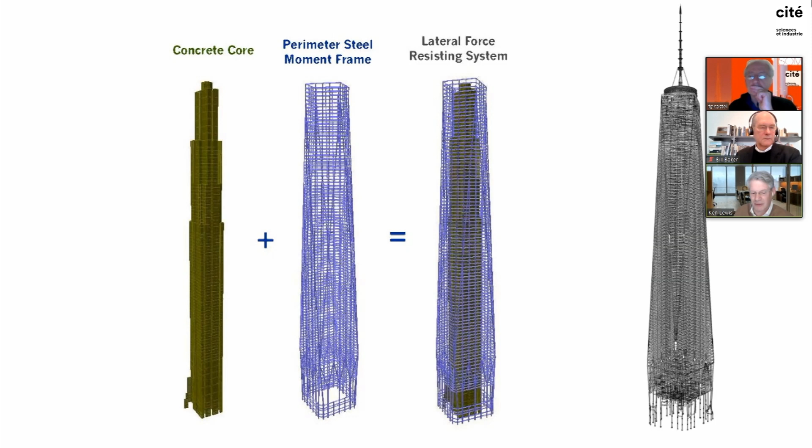What it also meant was that every single connection, especially because it's a moment frame, had to be welded and bolted. That is a much bigger burden on a tower than any other part of it. Forgetting the weight, forgetting the wind, it is a pretty massive effort. We often would see when the building was going up that welders would be on a weld for days on end, just building up these huge welds.

So we really asked ourselves, and we engaged with the fire department, the Pompier, and we met with them on a regular basis. To this day, I remember the smell of the men in their bunker suits, because they sometimes came from other fires to our meetings. We would sit there, and they were great partners when we were developing the building.

On the top of this picture is a stair as it would be built under the old code, which is fine and safe, with solid walls. This is the stair as it's being built at the World Trade Center. It's larger to allow two-way traffic. It has a large shaft at one end, that X you see there, so fresh air can be pumped into the stairs. The doors open into the flow of traffic.

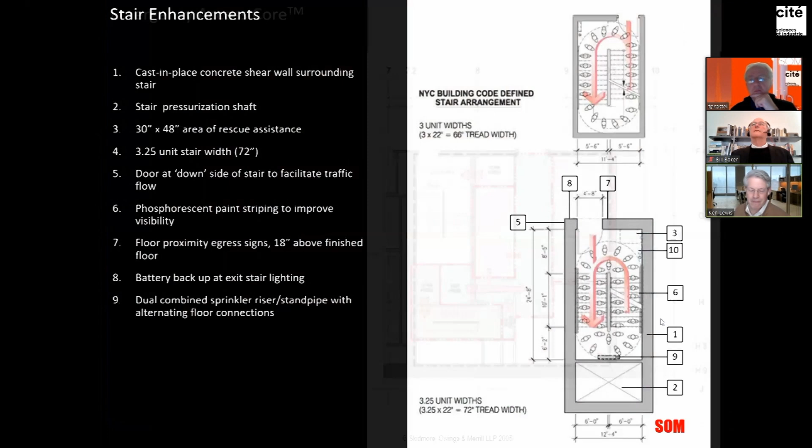The other piece of this is this core that I'm showing you, and we gave it a name: the Emergency Access Core. It has a number of key elements. Probably the most significant is elevator number 1, which during normal usage could be used for service. This is a service core where the service elevators ride, but during an emergency, it becomes the firefighter's elevator.

It's in its own shaft, with its own ventilation, its own set of doors, one leading to the stair and one leading to the lobby. As we went through this, we talked about all the things that could go wrong in a fire emergency. One of the biggest things is water that the firemen spray on the fire, which as soon as it gets in the elevator shaft, stops the elevators from working, and the firemen won't trust them. So we built in drains into the floor.

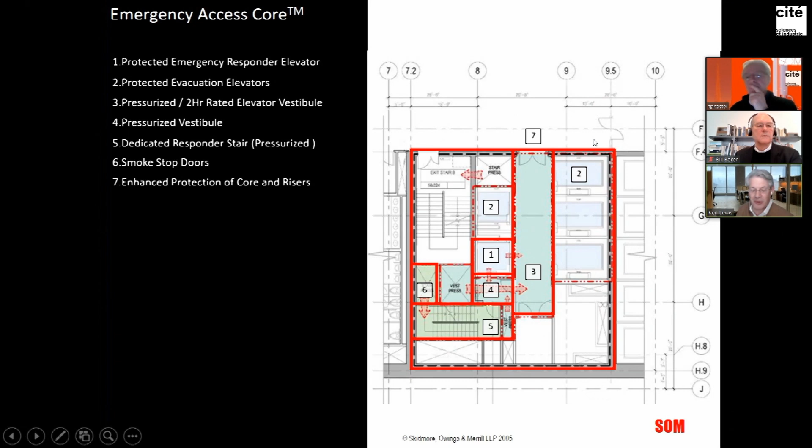We raised the sills up a little bit so that in an emergency, the fire department and firemen could use those large service elevators basically as ambulances to take out injured people, but also to evacuate all the occupants of the building. You'll notice the stair is much smaller - that's because it only serves the firemen, it's not part of the normal egress. There are other elements located within this protected core about communication and firefighting, including all the standpipes that bring water to the floor.

Now, I've talked about security and safety. 2001 was the beginning of the new millennium, an important date. We were talking about sustainability and had been for quite a while, and we thought this building and 7 World Trade Center and all the buildings needed to set a new standard for sustainability. So we engaged with many outside agencies, national and international, to talk about these issues.

We talked about issues such as energy, where it was being generated, new forms of energy generation including fuel cells for emergencies. We talked about all the construction vehicles coming to the site and the dirt and particulate matter they might put off because they use diesel fuel. So we created a program at the Trade Center to make it the greenest construction site, the safest construction site, and ultimately the first LEED gold site in the country.

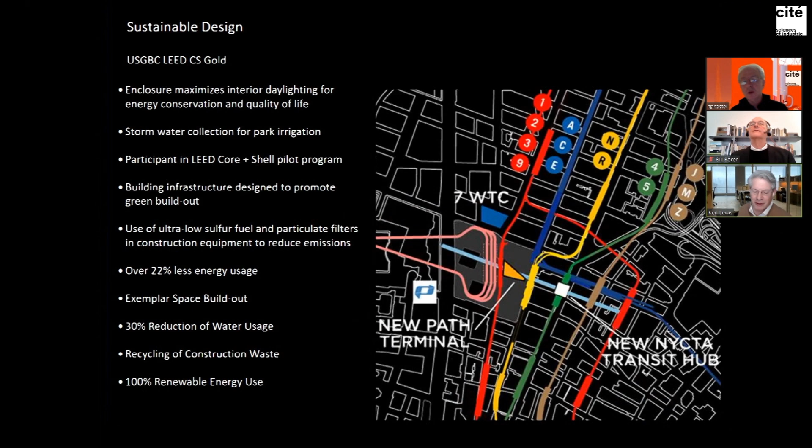Probably the most important thing we did was rebuild at the Trade Center. Because of all the subways that come to Lower Manhattan, people don't have to drive their gas-guzzling cars into Lower Manhattan. It's probably the greenest thing, and it's why I believe tall buildings and large-scale development in urban centers is still the pathway to a greener future.

Some of the elements were catalytic converters on the construction equipment, and the first time ultra-low sulfur fuel was used on the sites, which is now a standard in New York City on all construction sites.

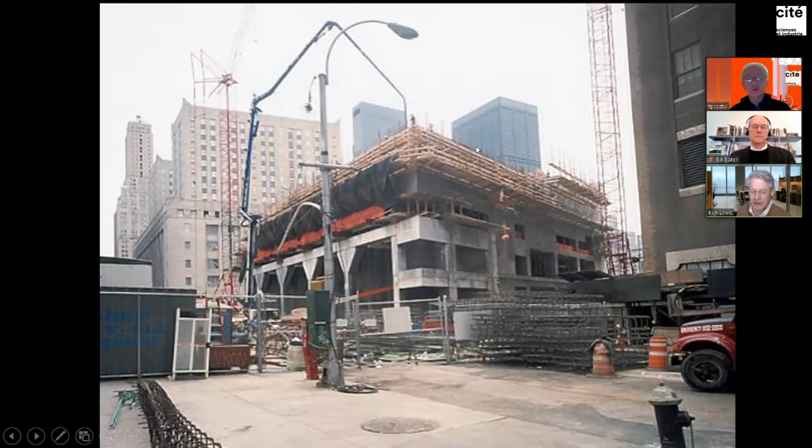Then there was the use of recycled material in the concrete. This is the building of 7 World Trade Center, and as you saw, when pouring concrete there was fly ash being used, which is a recycled material that comes out of coal and fuel. The steel also had to be at least 50% recycled content - I think we ended up closer to 80% in terms of the steel that's in the building.

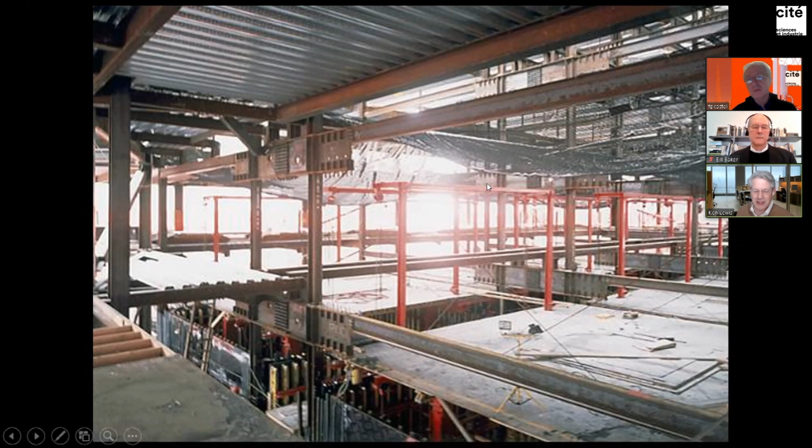We also began to use a new technique called jack forming, which wasn't new in many other places in the world. This is an Italian system in which the formwork self-jacks up the building, instead of in New York where workers would build the formwork, tear it apart, and move it up to the next floor. Now all the formwork went up inside the building, making it more efficient.

One other element at the Trade Center - we had 2 teams competing. There are 2 halves to our core, and they were the red team and the green team, as you can see here with the pumps. They competed as they went up in the building, racing to get to the top. The green team lost because the concrete machine had to be replaced about three-quarters of the way up, and they lost 2 weeks worth of time. Once we got out of the ground, it was pretty much construction as usual.

There was one other element you can't see in this picture, but it was a sandwich shop inside the building, right above this platform, where the workers could go get their sandwiches instead of going all the way down the building and out onto the street, saving time at lunch.

We tested the building many, many times. First for the color of the glass - this is the glass you see on the building. One thing I want to point out: these were the biggest pieces of glass that could be manufactured at the time. Prior to the World Trade Center, they were making glass about a foot shorter than this.

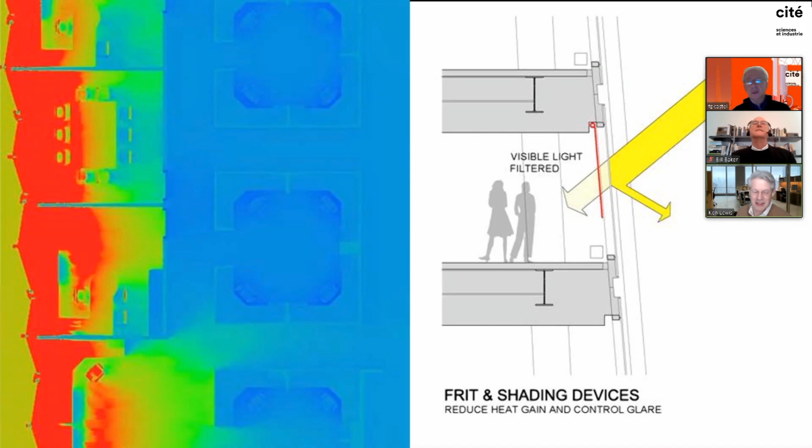So we went out and asked the manufacturers to create a glass that was ultra low iron, ultra clear, but also with a coating that would resist heat gain from the sun. And when you step inside, the visibility is unbelievable. As you can see behind me, that window is the same glass as at the World Trade Center, called ultra low iron glass, with a low emissivity coating on the outside, which is reflective.

How do you call it? Excuse me, we couldn't hear. How do you call it? Low emissivity glass coating. Thank you, yeah.

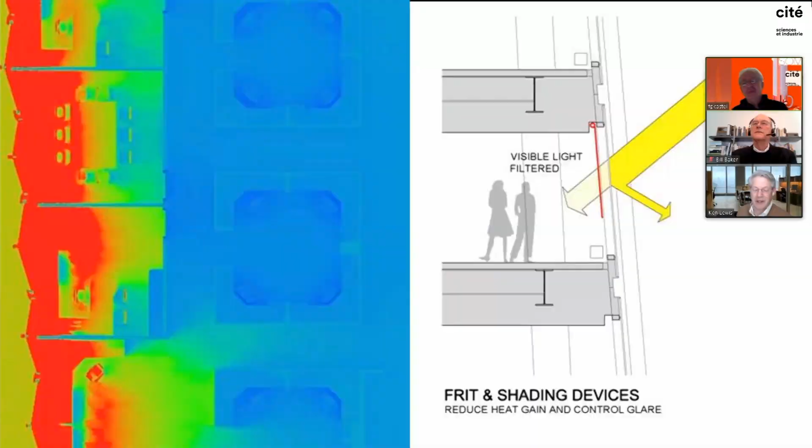You don't see the magnetometers out there, you can just walk into the building. There are cameras and all sorts of facial recognition software outside the building. But we wanted to plan appropriately in case that was needed, and we used these simulations, again using our BIM model to do it.

Now, building the building is an exercise in itself, but I think that's for another day and how the team did it. Some of the largest pieces of steel at the bottom weighed in excess of 160,000 pounds. I can't translate that into metric tons, I'll leave that to Bill.

It involved multiple elevators, actually 8 elevators going up the outside, with multiple teams. The reason for this is that while the steel was going up, the concrete work was coming up, the fireproofing was coming up, all behind it, so that the building could be occupied as soon as it was completed.

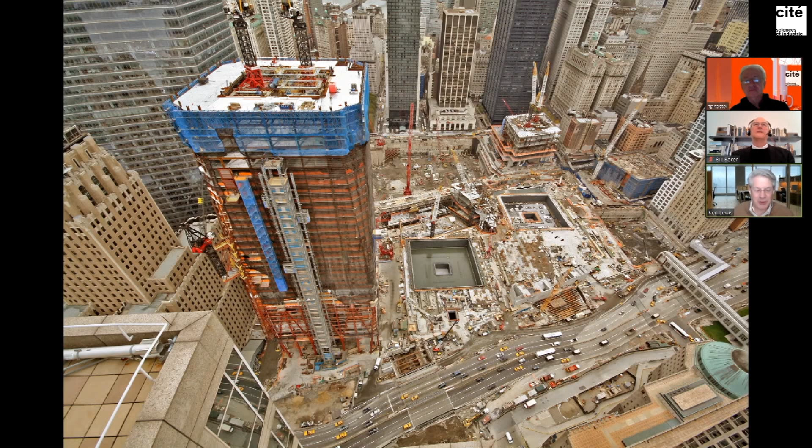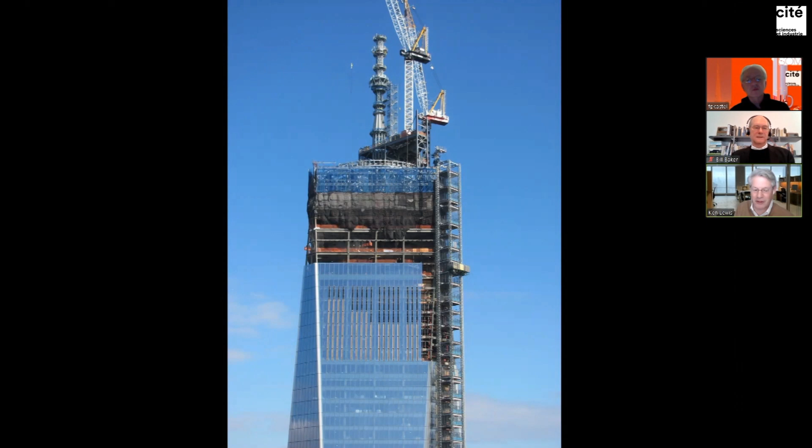Now, one last component I think is amazing. Some of the pieces were so big they had to be brought in by barge. This is the Spire coming down the East River and being placed on top. The Spire itself is a building unto itself, a little over 400 feet tall, erected in sequences, and ultimately became the cap of the building.

Now I'm going to finish with one important point, the last memory element I'll talk about. When you used to come to New York at the end of the day, the corners of the tower were chamfered, on 45 degrees. It would catch the sun in a way that none of the other buildings in New York catch the sun, both at sunrise and sunset.

And it would glow, these lines that went up the building. We took that as a memory element to create a face of the building and the edges of the facades, the segments you see here, in a beautiful stainless steel with a particular finish, a laser etch finish. You can see it here glowing.